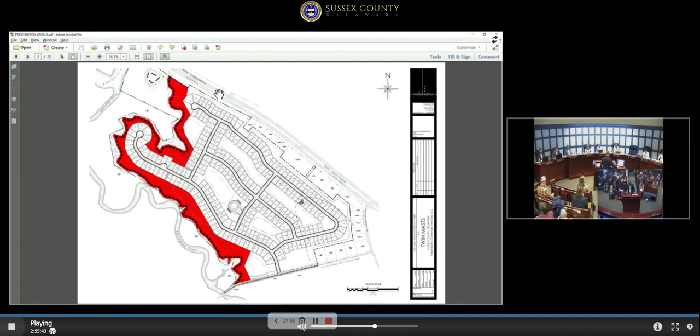Speaking of stormwater management, the site will handle stormwater via 6 proposed stormwater management facilities, which you can see here. It's anticipated at this time the facilities will be extended detention wet ponds. All stormwater management design will be in accordance with DNREC regulations. Stormwater conveyance will mostly be accomplished via closed conduit storm drain systems internal to the site, with some swales to convey runoff in open space areas. Those conveyance systems and lot drainage systems will be designed in accordance with both Sussex County and DNREC standards.

As you can see, the ponds are arranged in open space, with 4 located in the central area and 2 located around the perimeter.

This project does have considerable open space, as already mentioned. Approximately 68 acres of the site is within open space, which is approximately 51% of the site. The perimeter open space is contiguous and consists of over 51 acres. In addition to the perimeter open space, the interior spaces that mainly drove the design were defined as Areas B and D in the preliminary plat. If you come down the main road, those are the 2 areas on your right-hand side, and those areas were very much intentionally located.

When we were working on the land plan for Twin Masts, we were aware there's an airport in the vicinity of the project. As we worked through the conceptual layouts, we generally tried to keep that open space in alignment with the runway for Eagle Crest. If you look at this exhibit, you can see the larger open space areas central to the project were kept in general line with the projected runway, which again was very much intentional.

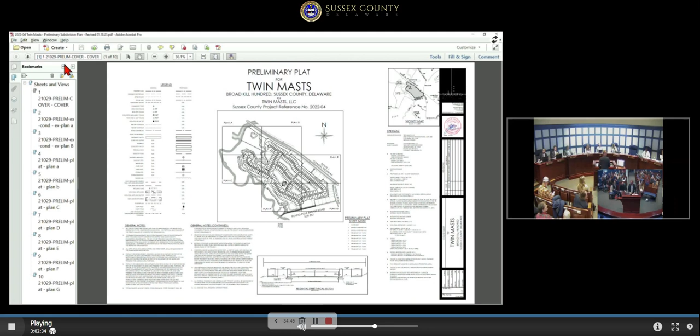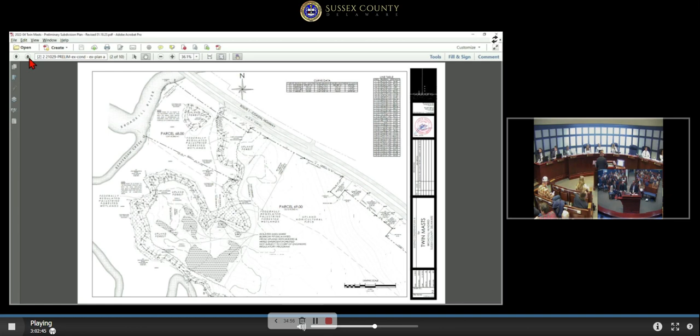Hey, Jamie, can you pull up the preliminary plat? So as a worst-case scenario, I can show you the intended lots on this exhibit. Can you scroll down, I think it's going to be split between pages, of course, so I believe it's mostly on Plan G. Okay, so at the risk of losing the mic here.

It's hard to see. Okay, so I will have to reread the condition. You know what might be better? Lots 132, 133. So lots 132, 133 are basically these two to the bottom left here. Keep left. You know what, let him control it. There you go, sorry, he was trying to do that and I was thinking he was still going. So basically 132 and 133, which are these two lots.

And lot 249, which is this lot across the way here. Oh, that's different than the one—at least the one I was looking at online. Okay, it might have been an older layout. It's the rendering. Okay, I apologize for that.

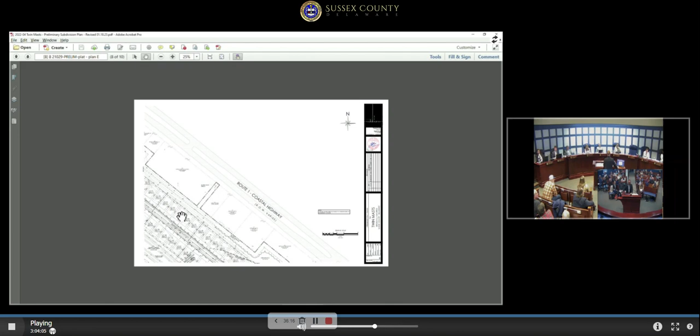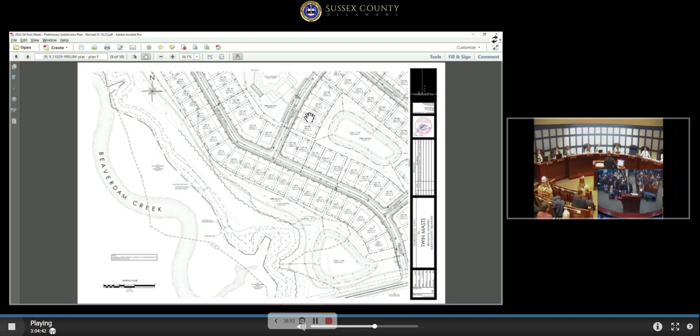What's the date of the site plan, the revision date that references these lot numbers? If you could just make sure we're speaking the same language. So this one has a revision block dated 11/2/22, or 11/21. We received this version on the screen, I believe on January 18th or 19th. Yeah, I think we didn't submit it until January. Okay.

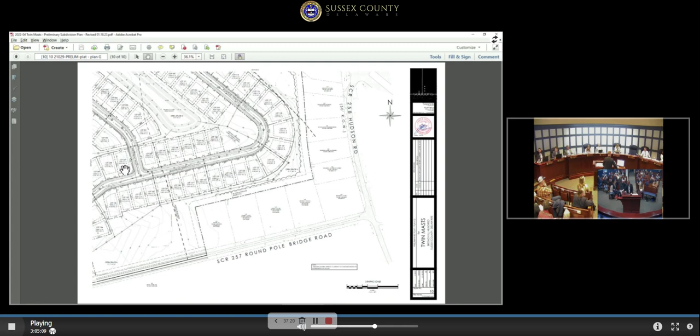And then the remainder of those lots, which we had, were 236, 237, and I believe we had 249—oops, I might have jumped. Oh, you know what, 249, I think I already went over that. That's right, it's that other one. Same plan, there you go. Yeah, 249 I already said. Okay, and so basically, thank you—it's the ones that are the most intrusive on that projected runway.

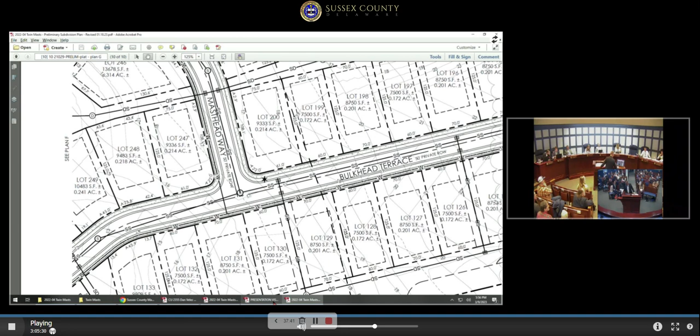So to get back into some of the other design standards for the site, as Ms. Peet has already presented, the site plan is for 249 single-family homes in an AR1 cluster subdivision. The site will have central water, provided by Artesian Water Resources, and the central water system will be designed in accordance with all regulatory standards, as well as Artesian standards.

Twin Masts will also have a central sanitary sewer system, which will also be provided by Artesian. The site does have a pump station in order to connect that sanitary sewer to the regional infrastructure. Again, that is going to be provided by Artesian.

The subdivision roads will be designed to meet Sussex County standards, and there will be an access point to this project off of Round Pole Bridge Road. Those entrance improvements will be designed in accordance with DELDOT standards.

Speaking of DELDOT, I'm going to begin presenting some portions of a presentation that was prepared by Betty Tustin, who's the project's traffic engineer. Betty is with the traffic group. Unfortunately, as previously indicated, Betty is not here today.

But I am certainly able to discuss portions of the traffic information, though when it comes to certain aspects of the traffic impact study, there may be areas extending a bit outside of my area of expertise. I'm a registered civil engineer, not a traffic specialist. I do a certain degree of traffic calculations associated with entrance plan improvements, but when it comes to the actual models and things of that nature, I do not personally put them together. Betty has professional transportation operational engineer certification, and that PTOE certification allows her a much more in-depth analysis of those traffic demand models. It's a very particular concentration in civil engineering.

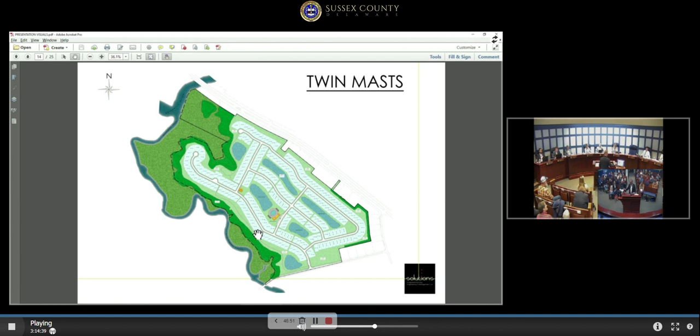The Federal Highway Administration conducts an annual survey of bridges; for the year 2022, 1.6% of Delaware's 872 bridges, which is 14 bridges, are classified as structurally deficient. The American Road and Transportation Builders Association reported the top 10 structurally deficient bridges in Delaware, and only one is in Sussex County, and that is Route 54 over the Assawoman Bay in the Fenwick Island area.

According to DELDOT's crash statistics, there have been 4 crashes along the entirety of Round Pole Bridge Road in the past 3 years. All were single vehicle crashes: 3 involved a deer, 1 involved a ditch, and only 1 involved an injury.

Thank you for giving me the opportunity to review the traffic impact study for Twin Masts as well as any other significant traffic issues.